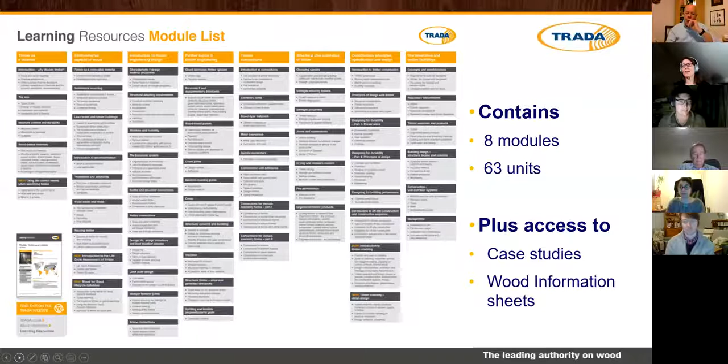In the learning resources, there are 8 modules and 63 units. So if you want to start with construction principles, specification and design, this is where you head. They are all PDFs. You click on them, download them, and save them to your computers. Why choose timber? Breaks it down into deeper depths, shows you the details, and shows you all the cross sections and what is called what.

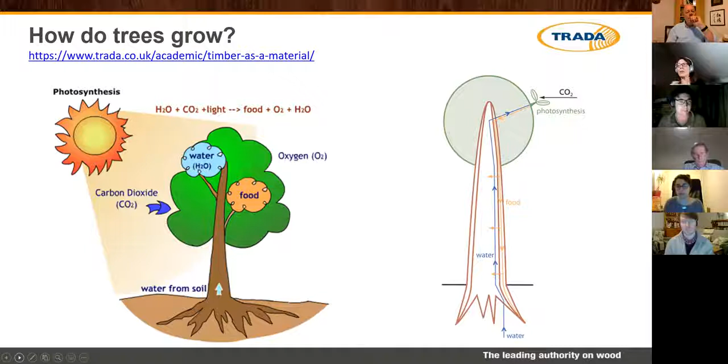But how do trees grow? You have a seed, you have some water, you have some sunlight and some earth, and up they go. They grow from the inside outwards. So if you imagine a traffic cone, imagine another traffic cone on top of that, and another traffic cone on top of that. And that's how they grow each year. Every year they grow outwards and they grow upwards. And if you see that little green shoot on the outside there, that's the branches, and that's where the leaves are, and that's where photosynthesis happens.

On the outside of each tree, there is sapwood, which starts in the middle, and every year as the tree ages and it grows outwards, that sapwood matures and turns into heartwood. Now, all sapwood is non-durable. Remember that, because we've got something to come back to in some later webinars.

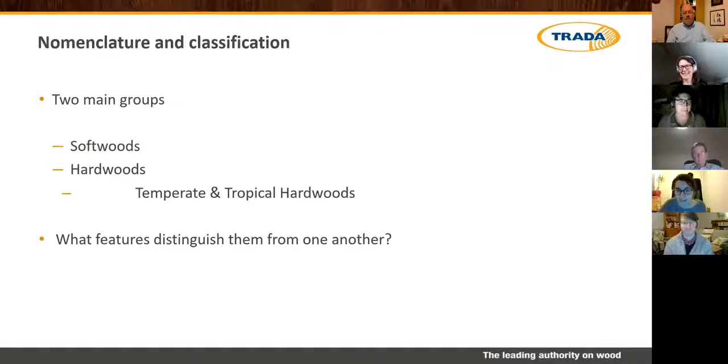What distinguishes one from the other is not what the majority of people think, it's the seeds. The softwood has a naked seed and the hardwood has a covered seed. So it's nothing to do with the branches, it's nothing to do with the leaves, it's nothing to do with the density, it's nothing to do with the durability. You come right back to the seeds.

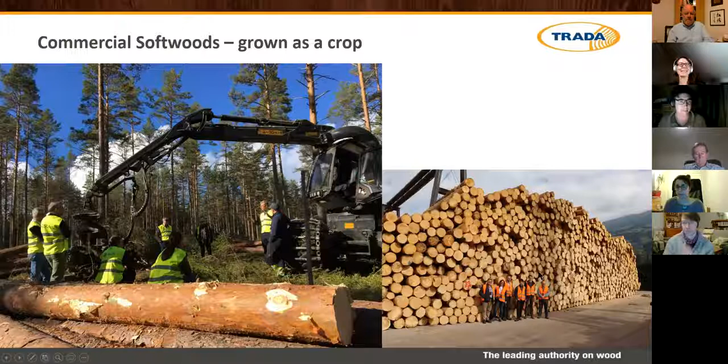So softwoods, mostly evergreen, needle-shaped leaves, 650 species, but only 60 in commercial use. But you'll probably only use 6 to 10 of those commercial species in construction itself. And commercial softwood is grown as a crop. So it's planted specifically for that reason. And we have a fair amount of it. And Charlie, I'm sure, is going to pick up on that.

Hardwoods, mainly deciduous, but you do have some evergreen. They are broadleaves, 50,000 species, 2,000 in commercial use, but they all have specialized end uses.

So green softwood, newly felled logs can have a moisture content of over 100%. Now, some of you will be going, is that true or false? Anybody in the chat box want to answer that? Can you have a log with more than 100% moisture content? I'll come back to the answer.

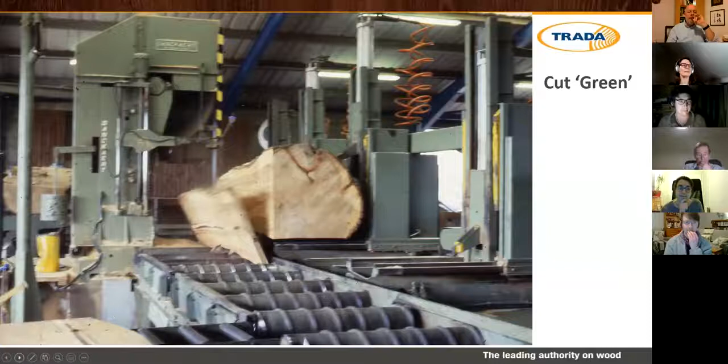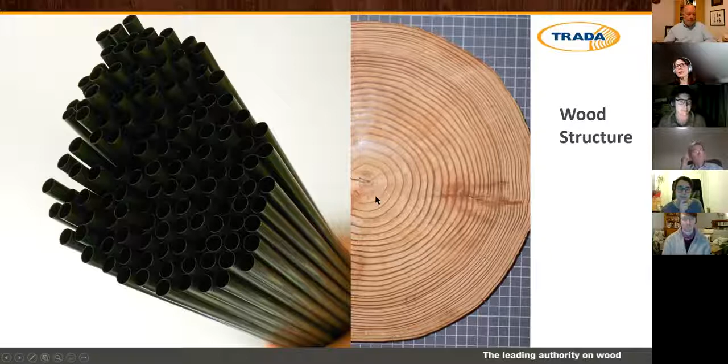And when it's cut, timber is green, and it is full of moisture. But to use it in construction, or actually use it in a house, we need to dry it down. So the wood structure, on a very basic level, it looks like a whole bundle of straws. So if you imagine all these little rounds here full of straws, you'd be looking down loads and loads of straws. And there you can see it.

So this is what I'm talking about. And this is the vessel inside those straws. And this is full of water. And the cell structure, the walls of those cells are also full of moisture. It dries from within inside the cell first and then outside, out of the cell wall. So different timbers, softwoods and hardwoods, have different wood structures, but I'm not going to touch on that. I'm just letting you know that.

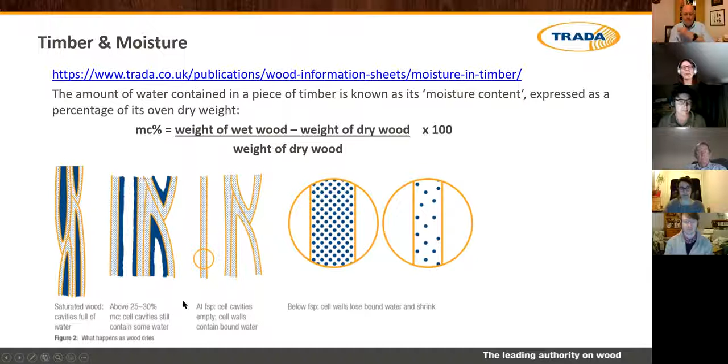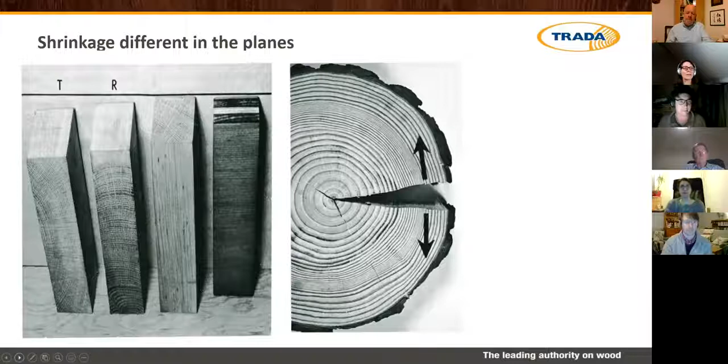Is shrinkage predictable? Yes. So if you see a cross section cut here from the middle of the tree, it shrinks to this pattern. If you have a quarter sawn board, it shrinks very evenly. If you have an edge board or a falling board, it will shrink, always cupping slightly towards the center. And this is something you want to bear in mind when you're looking at cladding and actually attaching it to a building. You're always better off putting the heart side outwards, so facing outwards.

So about moisture content, we talked about the wood needing to dry out, and it shrinks as it dries out. Now I'm going to zoom through this. When you say a moisture content, it's the percentage of moisture within a fully dried piece of timber. And how do you find that out? In our labs, we dry it down until there's no more moisture in it. And we get the weight, and then we do some calculations, and we find out what the density of that dry piece of wood is. And that's then how we work out the moisture content. But for any of you who are wanting to do it, get yourself a moisture meter, and that will indicate what your moisture content is.

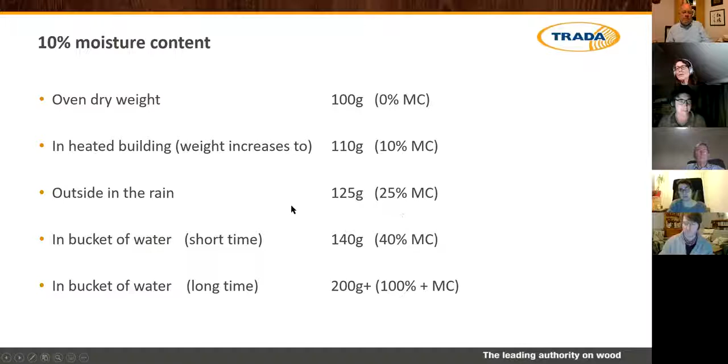And so within buildings, we're looking for a range of moisture contents so that the wood doesn't shrink, and so it also doesn't degrade. Because one figure, which I unfortunately haven't got on here, is 20%. You want to keep your wood below 20% if it's in construction in your building. Because at 20%, if it's held there for any length of time, it will start to degrade. And we want our buildings to last a long time. So we said shrinkage and movement is predictable, but with different species, you get different movement characteristics. So something to bear in mind when you're specifying your timber.

When I mentioned moisture content and why it's important: for external joinery, you're looking for 12 to 19% average moisture content. In an unheated building, you'll be looking for 12 to 16%. In a heated house, you'll be looking for 9 to 13%. And in a very nice and warm heated house, you'll be looking for 6 to 10%.

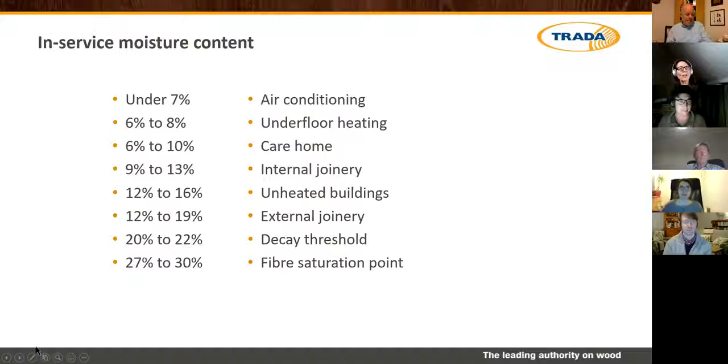And timber reacts to temperature and humidity, and it absorbs and desorbs moisture. So you can never keep it at one moisture content. It will always be adding and subtracting a little bit. But once you know where that timber is going to be, then you can predict what moisture content it will eventually settle out at. And that's called the equilibrium moisture content.

This is a chart we tend to use. In an average house, you'll be wanting to keep your relative humidity between 40 and 60%, because that's a healthy moisture content to stay at. Let me go back one. So 50% relative humidity, 20 degrees temperature. This is the indoor equilibrium moisture content you'll be aiming at. So 10 to sort of 12%.

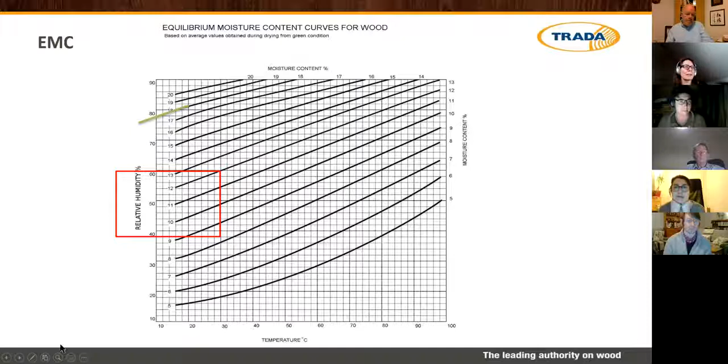And we have, from those sawn logs, a huge range of products that Iain will cover later. So we have sawn timber, we have timber-based products, and we have engineered wood products.

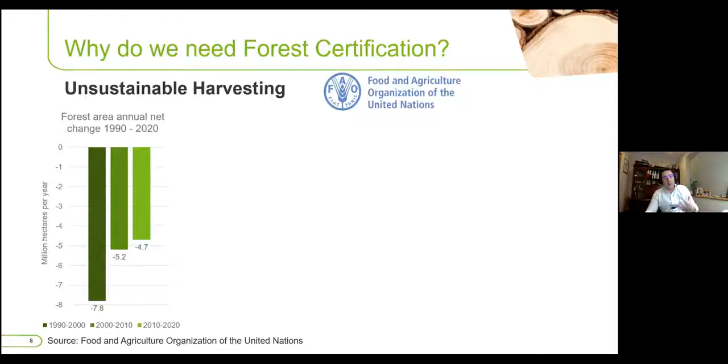So we do need to make sure that we try and slow that down and insist on sustainable forestry. Not all of that is down to timber. A lot of that is through land change, moving over to agriculture for things like beef production, soya and stuff like that. So it's not all to do with illegally sourced timber. A lot of it's down to land change in those areas.

So what does sustainable forest management look like? Well, Tabitha showed you some pictures earlier on. Softwood on the left, like I say, it's a crop, and generally over a 50-year rotation in a lot of cases, depending on where you are in the world. In the UK, it's generally around 50 years, and that would be thinned a number of times over that period. The picture there shows a 30-year thinning, and that material would be going into things like fencing, and the remaining trees would go into your structural timbers for building.

On the right, it's slightly different for hardwood trees. They're generally what we call selective felling. So you'd go into the forest and you'd only take out so much every year that would allow that forest to regenerate over a certain amount of time. So in the hardwood forest, you never actually clear fell in most cases. Softwood forest you would, and you replant.

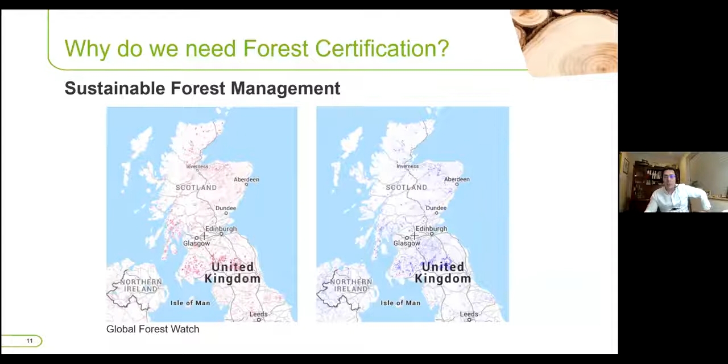Similarly, in the UK, a lot less forest cover. We've only got about 13% forest cover in the UK. But you can see there that where most of our forestry is located up in Scotland, a good correlation there between what's coming out and what's gone back in. But when you compare that to places like Brazil, South America generally, you can see there that there's not a lot growing back from what's been taken out. I think Chile's the only South American country that's deemed to be low risk, sustainably managed forest.

So looking at the UK timber market, what does that look like? These are the latest data from the Forestry Commission.

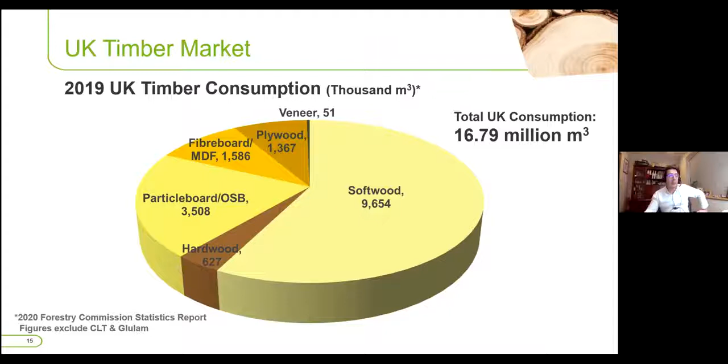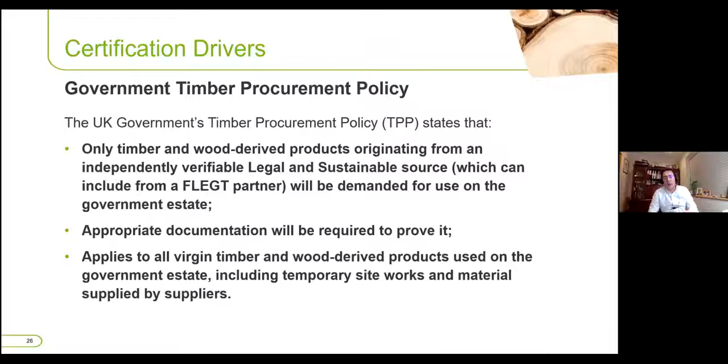Now the drivers, you're going to know a lot of these drivers, but probably the main one that started it was the UK government's timber procurement policy, which requires all timber to be from a sustainable source, and they will ask for evidence for that on projects that are from the government estate. That's been picked up by a number of building certification schemes, so things like BREEAM, LEED and SKA all require certified timber for their schemes.

And in addition to that, the UK Timber and Timber Products Placed on the Market Regulations, which came out in 2013, based on the EU Timber Regulation, now just apply to the UK because of Brexit. This is just for legality, but it's a major driver in making sure that all the timber has got due diligence associated with it, and a lot of that due diligence can be covered by the certification schemes.

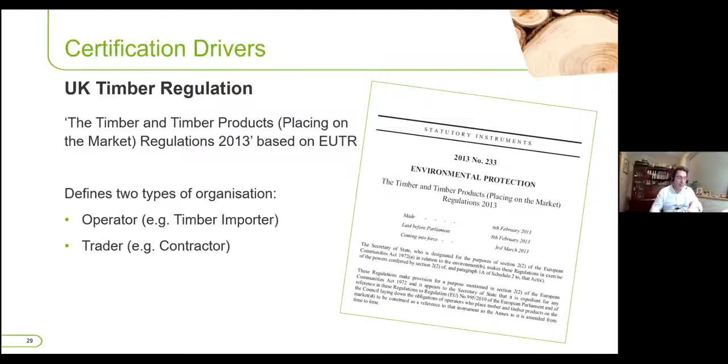And we had a great discussion last night on climate for those here, and another one tomorrow, so I won't go too much on that. All I will do is point in the direction of things like the Wood CO2ts Less campaign, which is trying to promote timber. But the key driver, in my experience, has been reputational damage. We've got all those key drivers there, but people don't want to be seen in the press as getting it wrong.

So what should we be doing? How should we specify the timber that we bring onto our construction sites? Well, for me, there are five main points that we need to make sure that we cover in a specification clause. We must reference timber and other wood-based products. Lots of other wood-based products are used on construction sites, so make sure we reference those. Make sure you define the scope.

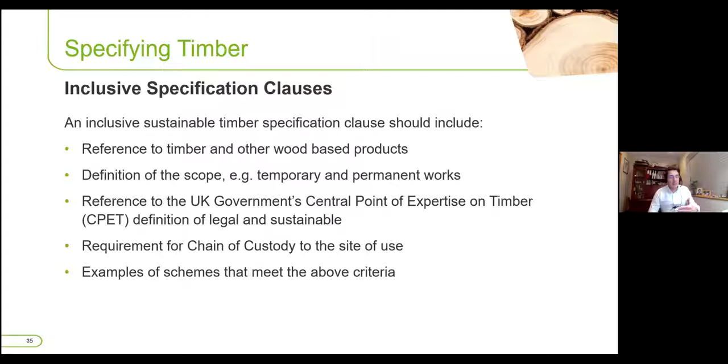Key one for me, make sure there's a requirement for chain of custody to the site of use. Like I say, we'll talk about chain of custody in a minute, but make sure that's there. That's your guarantee when you get that delivery ticket on site that the timber that's arrived on your site is from a certified source. And where you can, put examples of schemes that meet that criteria. Now we've got a standard one here. I think Tabitha's going to be sending around slides possibly later on, but you can pick this out.

This specification here: all timber and wood-based products for either temporary or permanent inclusion in the works must be from legal and sustainable sources as defined by the UK Government Central Point of Expertise on Timber and be delivered to site with a full chain of custody. Chain of custody certification schemes recognised as meeting the above include PEFC, FSC and Grown in Britain. So that's all you need to have in your specifications. That will cover all the timber on your project.

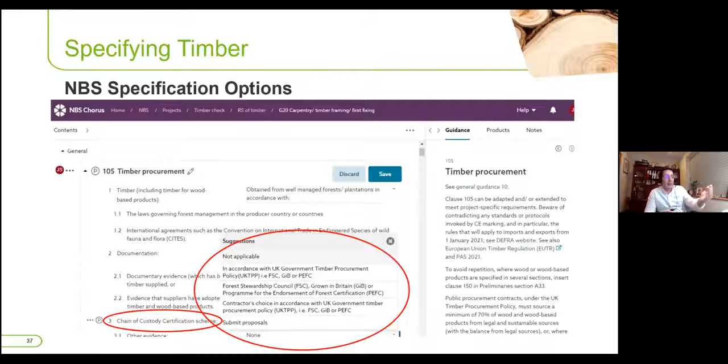If you're using things like NBS, we've been working with NBS and you can use their standards as well. So 105 timber procurement gives you almost the same requirements there, and sets the chain of custody schemes that you need to adhere to if you're using NBS.

So chain of custody, we mentioned it a few times. What does this mean? Well, chain of custody, we've got our forest and that's certified to, for example, PEFC. So the timber coming out of that forest can carry what we call a claim of either PEFC, FSC or Grown in Britain. Nowadays actually it can cover all three. All 3 claims can be on the delivery ticket. Can't be on a label, but it can be on the delivery ticket. That material is delivered to a sawmill and that sawmill has to be audited against those chain of custody standards for those 3 schemes, again, to be able to pass that claim on to the next person in the chain.

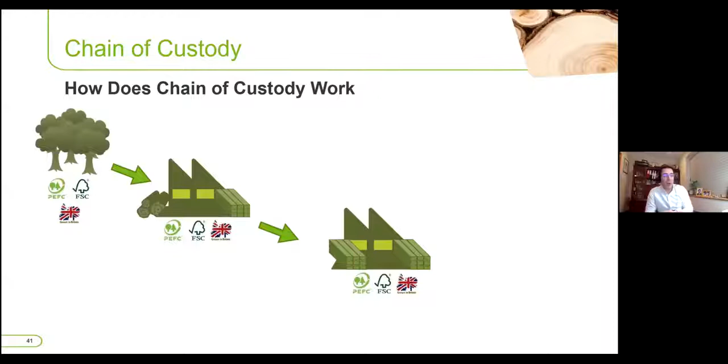Talked about auditing earlier on, and NETTA talked about how their members are audited to make sure that they can pass those claims on. Again, that sawmill will pass that timber on to, say, a merchant. There could be an Arnold Laver, Travis Perkins, someone like that. Again, that organisation will be audited, and those branches will be audited to make sure that they are applying the standards correctly. And then that timber is delivered to site.

Your site does not need to be certified. All you're doing is checking to make sure that the timber delivered to that site carries a claim on the delivery ticket. There is an option to certify the site as a project certification, but that wouldn't necessarily be talked about, and we're not talking about project certification at the moment.

Any timber that goes anywhere else to be fabricated into a product, so if you've got furniture coming into site or windows or something like that, and that timber's either going direct from the sawmill or from a merchant before going to your site, again, that person doing anything to that timber needs to be registered with a chain of custody as well.

And if you've got an inclusive policy that includes all the certification schemes, it doesn't really matter what certification one of those bodies holds. If, for example, our furniture manufacturer only buys PEFC timber, then there's no point in them having the other two certification schemes. So they might just hold PEFC and supply PEFC certified timber into your site.

The issue comes when they don't hold anything. They may be buying certified timber, but if they don't hold that chain of custody certification themselves, they then can't pass that claim on to your site. And that's what we call a broken chain of custody. And in this situation, it's easy to spot because they wouldn't hold a chain of custody certificate. The trouble is where they are buying timber that's not certified from someone else down the chain.

And that's where it's not as easy to spot, because you might go to your merchant or your timber supplier and ask for their certificate, say they're registered as a chain of custody, but this is why you need to make sure that it's actually on the delivery ticket as well.

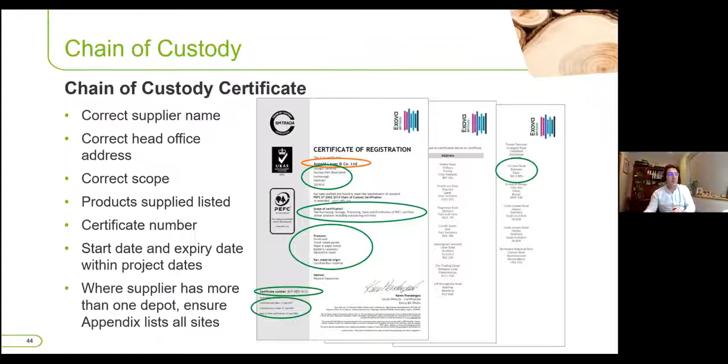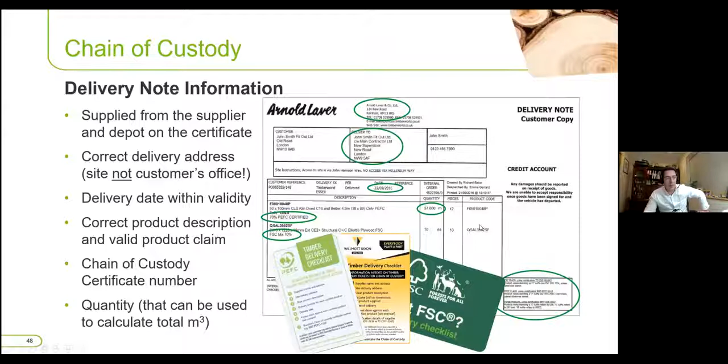There are various tools to help you check this. PEFC's card is great, so if you need any of these, I'm sure PEFC will be willing to supply these to you. It's a great little check card you can hand out to staff on site to make it easier to check that the timber's from the right source.

So we talked about claims. Just a quick touch on what claims you need to look for. Chain of custody claims: if it's all from a PEFC certified forest, for example, you will see on that delivery ticket that it says 100% PEFC origin. But in a lot of cases, you will see a percentage claim, and the minimum will be 70% because that's the minimum recognised by CPET. But that doesn't mean that only 70% of that timber is sustainable. All of that timber is sustainable. What it's saying is only 70% is from a PEFC certified forest.

So in this example, we might have 70% from a forest in the UK which carries PEFC certification, with 30% coming from a UK Forestry Standard source, which doesn't meet the requirements of PEFC. That would go into the sawmill, they would mix that in the sawmill, and it would come out with that 70% claim. So all of the timber is from a sustainable source, but only 70% from a PEFC source.

That's raw timber, say a sawn timber product, but it may be a product like a door. In that case, the door manufacturer further down the line may be buying timber from two different sources. One is maybe the FSC chipboard core, and the other is PEFC certified, say, oak veneer and lippings. In that situation, that door manufacturer can decide which one he wants to go with, by volume obviously. So in this case, it would be FSC.

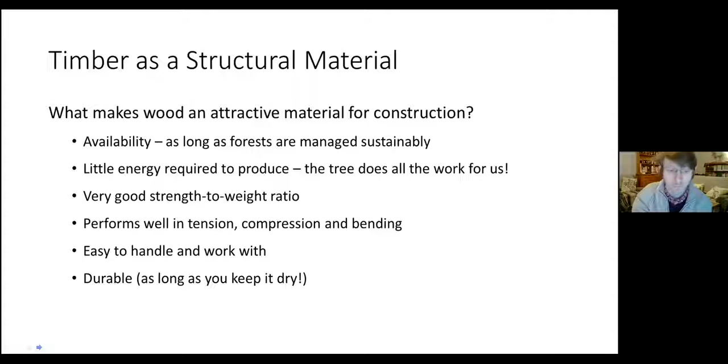It's a very strong material. It's got a good strength to weight ratio, performs well in tension, compression and bending, and it's easy to handle and work with on site. And as long as you keep it dry, it's also very durable and can last an awful long time.

So it's a natural material, and it's important to remember that wood isn't really just one thing. There's thousands of different species, as Tabitha's mentioned, and also different environmental growing conditions have an effect on the properties of the timbers. So a Sitka spruce grown in the UK will have different properties to Sitka spruce grown in its native Alaska, for example. So we need to think of a way that we can categorize this timber so that we're not using timber in an inappropriate place in a building or structure.

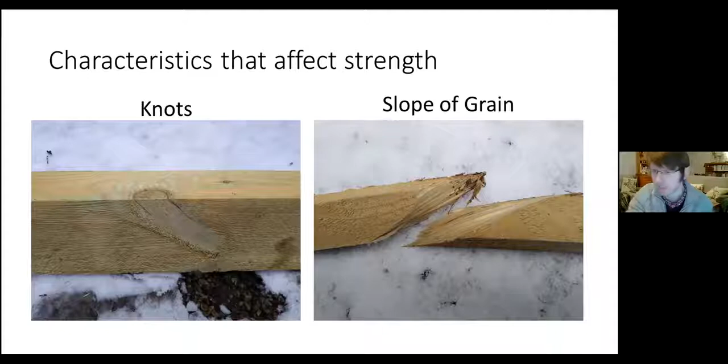On the right, the slope of grain. We said how the timber is strong along the grain, but once the grain starts to be angled to the axis of the piece of timber, then it weakens. And you can see here how this piece of timber has just sheared through because of the angle of grain, which you can see is about 30 degrees to the piece.

So looking at these natural defects, we grade the piece of timber. So there's two ways we can strength grade timber. We can do it visually, i.e. a human being looking at a piece of timber and using rules based on the sizes of the knots and the angle of the grain to decide if a piece is strong enough or is not strong enough and is rejected.

Similarly, you can use a machine to use a non-destructive test, such as bending it or scanning it with a laser to pick up these natural defects, and again categorize as a pass or a fail. And the strength grade in combination with the species and the origin of the wood allows us to assign a strength class to that piece of wood.

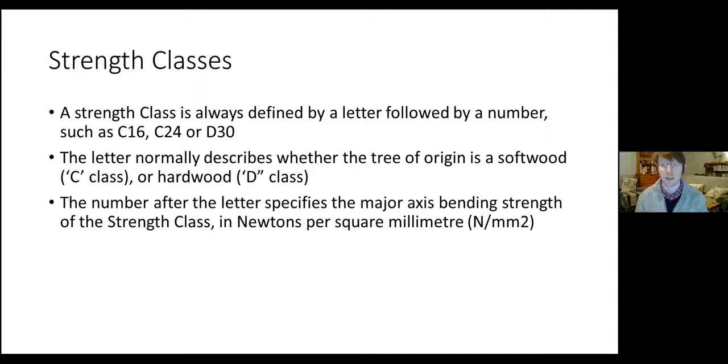So strength classes are defined by a letter followed by a number. The letter stands for softwood or hardwood, C or D class, and the number represents the major axis bending strength of the strength class. So that's in newtons per millimeter squared. So a C16 piece of timber would be a piece of softwood that has a bending strength of 16 newtons per millimeter squared.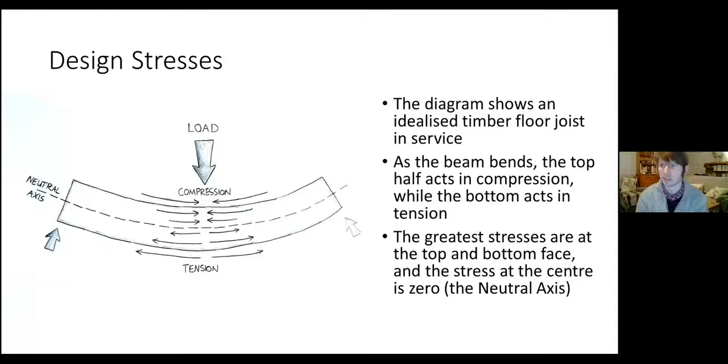So if we think about that, that means that actually a lot of the timber in the center of a standard section of timber is not really being used efficiently because it's got very low stresses. So there are natural limitations to solid section pieces of timber. Also, just growing sections of timber for larger spans takes more time, which is more costly, and with modern growing and harvesting techniques, you're looking at a 50-year rotation. So actually growing really large sections of timber just isn't very easy.

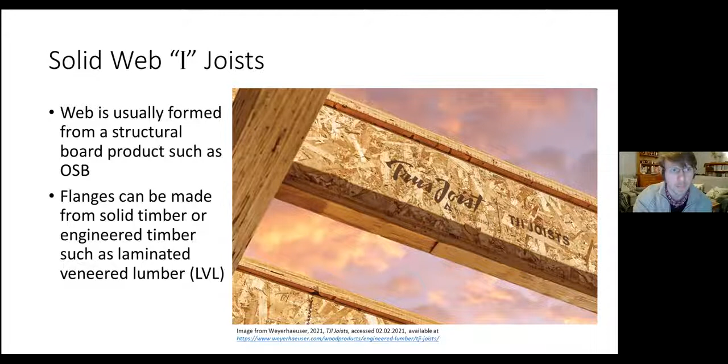And you can also get metal webbed I-joists. So these have advantages in terms of installing services. It's very easy to slot them into the depth of the floor, and these are also easier for smaller scale manufacturers to construct, so there are more producers around. And yeah, these I-joists give you that advantage of being able to span further with less material.

Another engineered material that has been developed is glulam. So throughout the 20th and 21st century, there's been this tendency towards larger structures, larger spans, and in just solid natural timber, there'd be a risk of timber being left behind. So in order to sidestep this, and with the increasing development of really good structural adhesives, it's allowed the development of glulam, or glued laminated timber, where small sections of high quality, low defect timber are glued together. You'll notice that the grain of each of these small sections is running in the same direction, so that the strength along the grain is maintained, and these are typically used in beams.

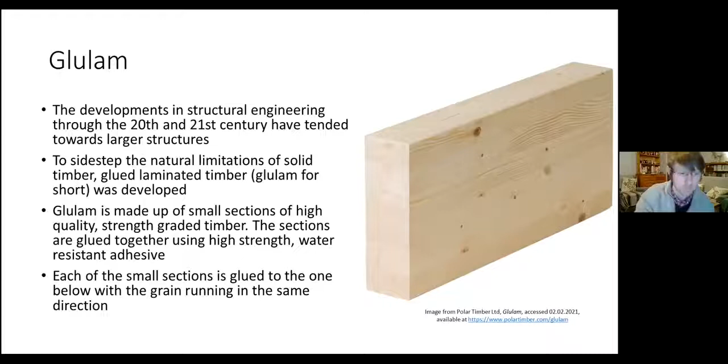So here's just an example of just how large you can construct them, and that's 1.2, 1.5 meters deep, and they can span up to 30 meters. And really, the major limitation is actually just getting the beam onto site on the back of a truck. Just another photograph. Glulam is also very popular architecturally, because it's visually very appealing, as well as being a very high-end structural product.

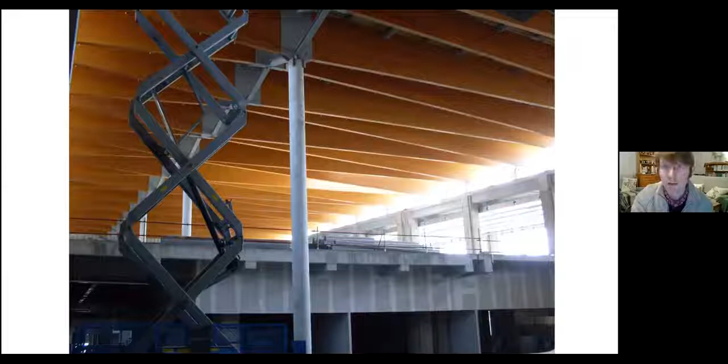So we can form glulam in two different ways. With the stresses being concentrated through the section at the top and bottom, we can take advantage of this and put higher quality, higher strength class material at the top and bottom of the laminate glued section. So that's called combined glulam. And alternatively, if all the sections have the same strength class, then that's known as homogeneous glulam.

And the final engineered product that we're going to look at is cross-laminated timber. So again, it's manufactured in a very similar way to glulam, but rather than the sections all being glued with the grain in the same direction, these are formed cross-banded. So you can see that the grain on one layer is perpendicular to the sections above. So rather than beams, this is used to form large panels, which can be used to construct walls and floors.

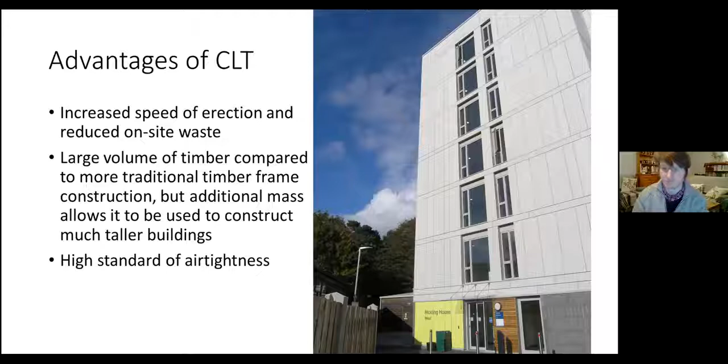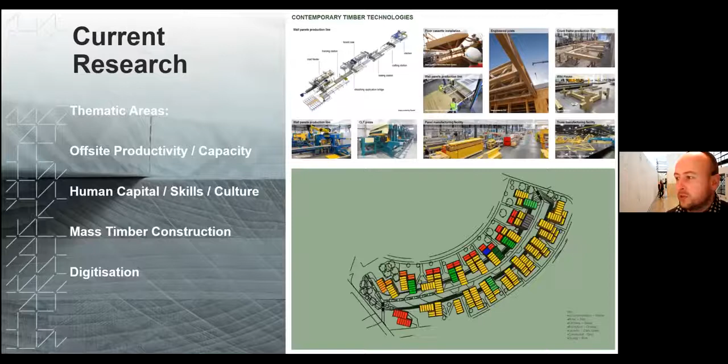A lot of work in mass timber construction with a large focus on integrating the supply chain or the value chain, so we get more homegrown timber utilised in these products and systems, and there's a lot of good stuff happening in that regard at the moment, and a lot of work also in digitisation. The premise for that really is to demonstrate the whole life value proposition of why you should use timber and offsite industrialised forms of construction. So yeah, we do a lot of this stuff and generate a lot of outputs.

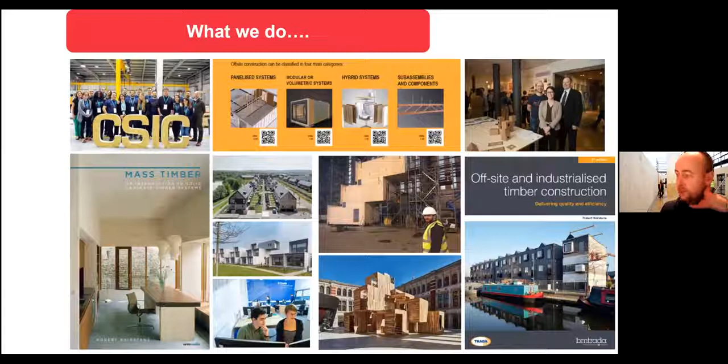But I think this evening really it was to look at one of these outputs and give an overview of this, and really just work through a bit of a synopsis of this book that was produced by myself on behalf of TRADA. So we'll use that as a framework for what we'll go through and how these types of approaches really can look at delivering quality and efficiency.

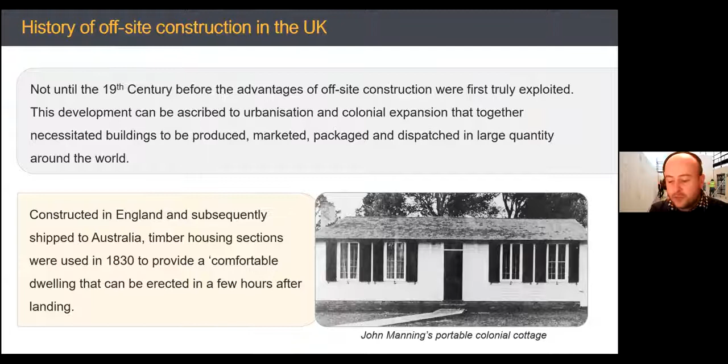So yeah, offsite is really interesting. Just a bit of background context. It's not actually that new. We can even go back to the likes of cruck frames, but it really took hold early 19th century. You have things like the Manning cottage, which were exported as a result of colonisation in Australia, etc. So lack of skills, need for shelter. So houses essentially fabricated in the UK and shipped abroad. So these forms of construction have evolved. So I mentioned cruck frame, manufactured off-site in carpenters' yards for quality assurance purposes, before they're shipped to site.

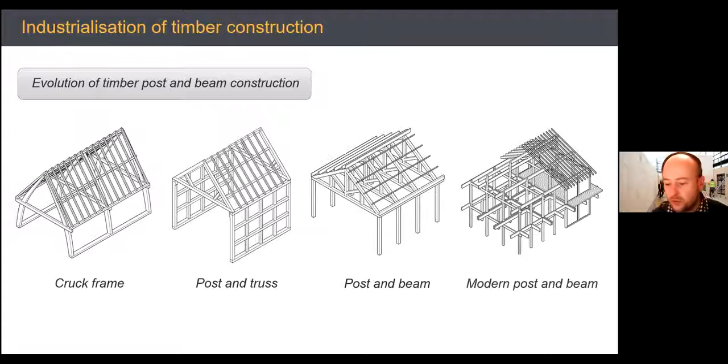But post and truss forms evolved, and post and beam, and then you've got modern post and beam systems. And I think what's interesting is these forms all still exist, even cruck frames, Oakwrights, for example, in the southwest of England, but they use CNC machining for their joints. We have other forms of timber frame, so box frame construction, balloon framing in America, which evolved to platform framing, and then you have the modern closed panel systems, so more levels of enhancement, incorporating engineered products and systems within them. And again, these forms all still exist in a sense. And even the mass timber products, again, an evolution of what's taken place.

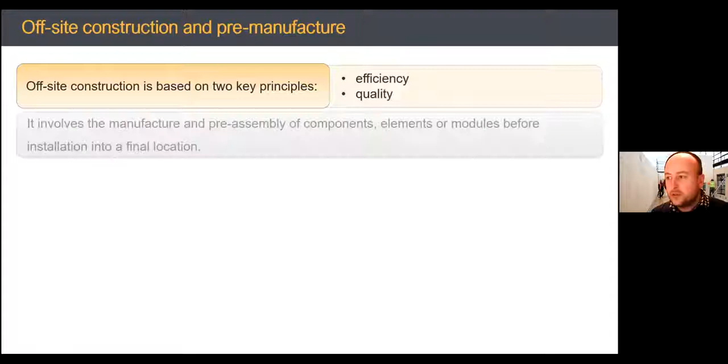We had round log construction, with sawn logs to create square log construction, and then with the advent of mechanical or indeed adhesive types of fixings, we had the creation of cross-laminated timber. So these forms of construction have evolved as a result of the material and the context, but also the type of timber in the region, etc.

But we can loosely categorise offsite into 4 broad categories: panelised, volumetric, hybrids, where you've got combinations of these, or indeed sub-assemblies and components. And you can either have one consistent form through your building, or a combination. So that's where you move towards levels of, say, customisation.

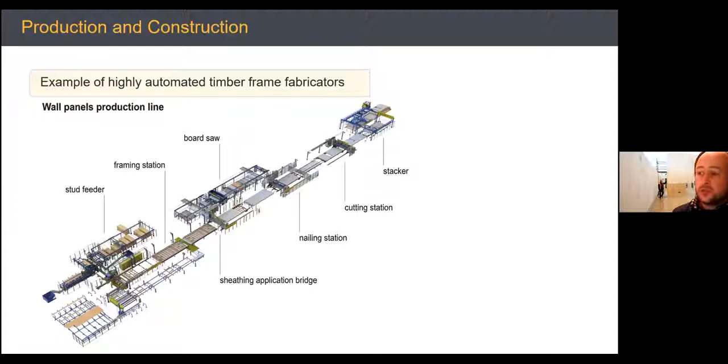So, as I've explained, things have evolved, mechanization has evolved, and now we've got even full production lines with higher levels of mechanization, or indeed automation, with things like robotics coming more to the fore. And all of this is about improved levels of quality and efficiency, and balancing that with the relative level of standardization and the product supply chain.

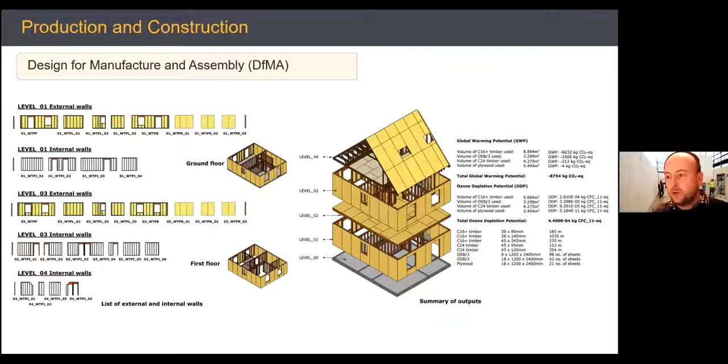I mentioned digitization, use of computer-aided design and correspondingly computer-aided manufacture, and in line with that, thinking about how you design for manufacturing assembly. And I like to think of what are the capabilities of your manufacturing setup rather than the restrictions. So what are the capabilities of it, and correspondingly how do you design for manufacturing assembly? And if you want to think beyond that, what does this mean in terms of circularity and disassembly, reuse and reutilization, so that you maximize the value of the resource in the built environment?

So when you're thinking of offsite, think of it in terms of a production flow: your standard production flow, or what you could be doing offline from that standard production flow, in order that you create degrees of standard product and customizable product to reach the client's requirements. And of course, how you do this in an efficient manner, and how you adopt the principles of lean. So teamwork, just in time, communication, transparency, waste reduction, not just product waste, but also time waste, etc. So it's all about how you embrace these types of theories and approaches.

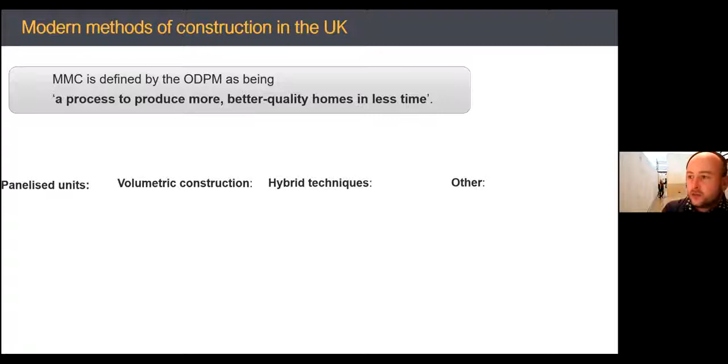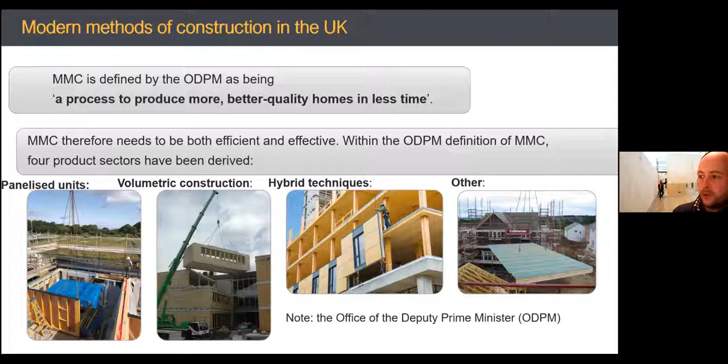In line with that, modern methods of construction is often a terminology used. I think key for me when you're thinking of MMC, it's about efficiency and effective ways of working, and innovative ways of doing things. So there are categorizations of it, but I tend to think of it more broadly than these categories, because one of those categories is other. So those other forms can actually take place on site, such as full floors built at ground level and then lifted into position, or the proprietary construction of a roofing system. So there's other forms of what you can do, not necessarily fully off-site.

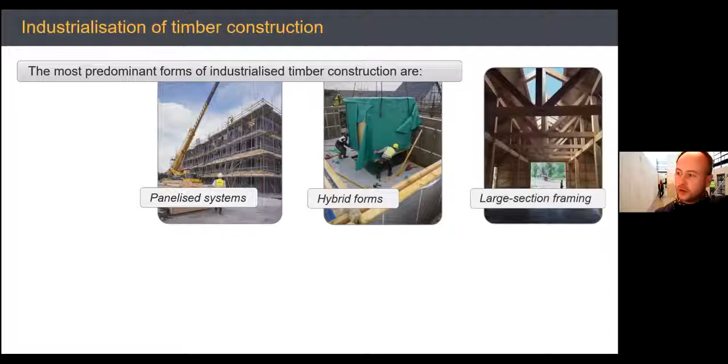In line with that, there's the Farmer Review and thinking about pre-manufactured value add, in terms of what level you're doing off-site, and what proportion of modern methods of construction you're applying on site, in terms of gaining your efficiencies and meeting your clients' needs with customized solutions, etc. So without getting too bogged down in terminologies, it's just to point out that there are a range of products and systems available: panelized, hybrid forms, large section framing, volumetric, mass timber construction. And we'll touch upon mobile, digital fabrication, pop-up factories, the flying factory.

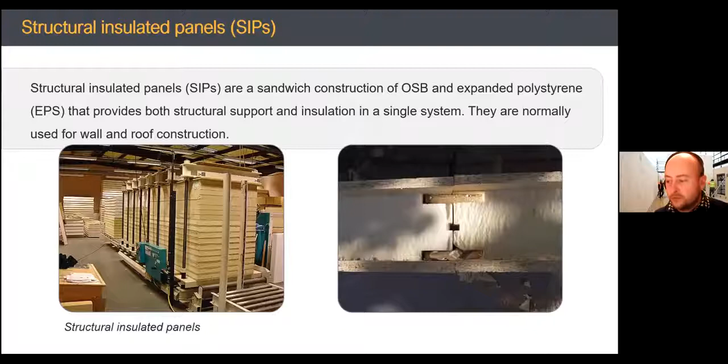So there's a whole myriad of ways of doing things, but it's about how you deliver with efficiency, thinking of design for manufacturing assembly, and indeed disassembly, reuse, and to that end, circularity, and correspondingly a more industrialized approach, employing lean techniques. And when we think of panelized systems and combinations of materials, just to touch on structural insulated panels, I tend to prefer more natural forms of construction, but SIPs, oriented strand board with expanded polystyrene, manufactured off-site to improve thermal performance, air tightness, and reduce things like cold bridging.

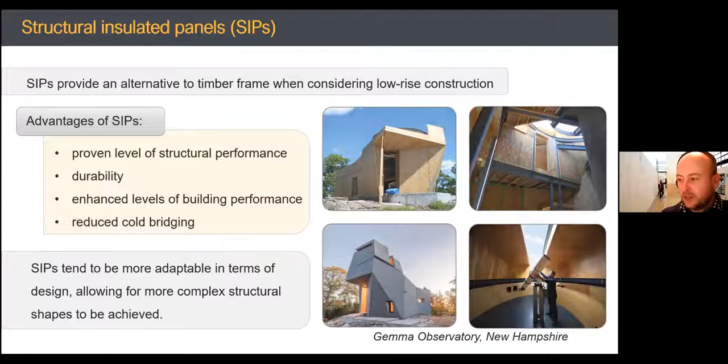And these types of products and systems have advantages in terms of how they combine materials for improved structural performance, and as I say, reduce things like cold bridging, and indeed they can be quite adaptable forms of construction in terms of how you can make these panels and then cut them up to form different shapes. And they're a neat example of where it's been used in an observatory, because seemingly high-powered telescopes need to have good moderation of internal thermal performance. So I think it's given due consideration to the context to which you're applying the techniques.

So solid laminate timber systems have been touched upon. There's a full range in there. There's glulam, there's laminated veneer lumber, there's cross-laminated timber, which use adhesive bonding techniques. There's also the structural composite lumbers like laminated strand lumber or parallel strand lumber. They tend to be more in North America, but we have a lot of LVL, certainly via Metsä

Wood in Finland. But you have mechanical forms as well, nail laminated timber using aluminium nails, so you can CNC machine. You have dowel laminated timber, which uses hardwood dowels of low moisture content, which swell and lock together the softwood lamellas. So they have a mechanical performance through full utilization of timber and different timber types to make that mass timber component.

As has been touched upon, as a result of these mass timber products, there's exponential growth within the market, and it's grown from these stats in 2017, and you can see that there's still a huge volume of timber that can be utilised for these types of products in order to sequestrate carbon in the built environment, and these mass timber products and engineered products and systems provide scope for larger spans, or higher stories and so on.

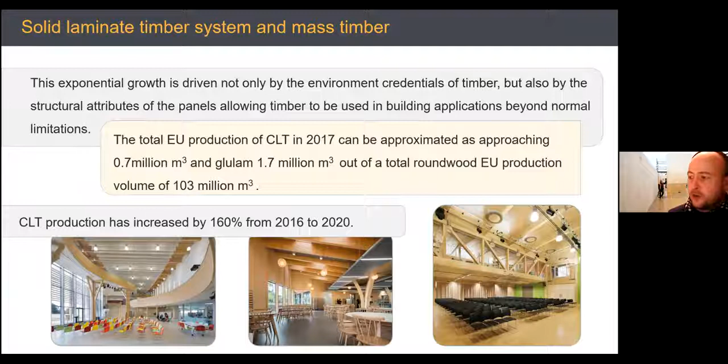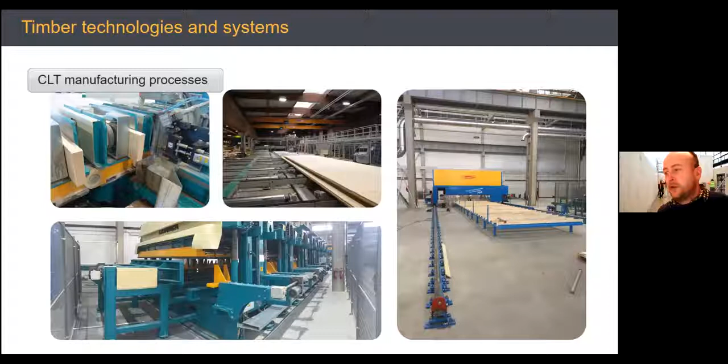In terms of that, again, cross-laminated timber is manufactured off-site: defect cutting, removing the knots and finger jointing, stacking the lamellas up, and then obviously applying an adhesive and pressing that. And then at the end of it, CNC machining. So again, what's key in that is, because you're using adhesives, it has to be a controlled environment. So managing moisture control, etc., and having high levels of quality, performance, and accuracy.

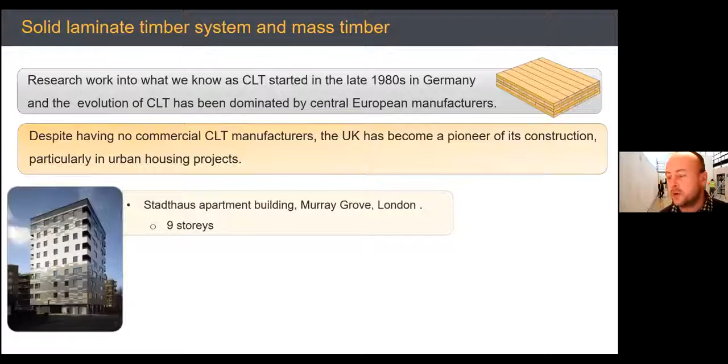The research work for CLT has been claimed to start in the 80s. And currently we don't have a commercial manufacturer in the UK as such. We do produce it in Scotland on a pilot scale through the Construction Scotland Innovation Centre, and indeed we've just finished a project there before Christmas to be exhibited at COP26. But the main stuff is really imported.

There were the original projects in terms of Stadthaus, and then there was a lot of work by Waugh Thistleton architects and others really pushing the boundaries in terms of how this product can be used. Of course, things that are impinging upon that just now are fire performance, the Grenfell Tower disaster, etc., and restrictions in terms of story heights. Nothing to do with timber, but ultimately it impacts upon how timber can be utilised in the UK market.

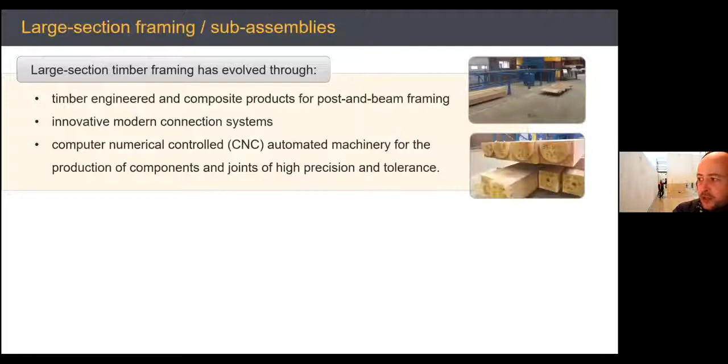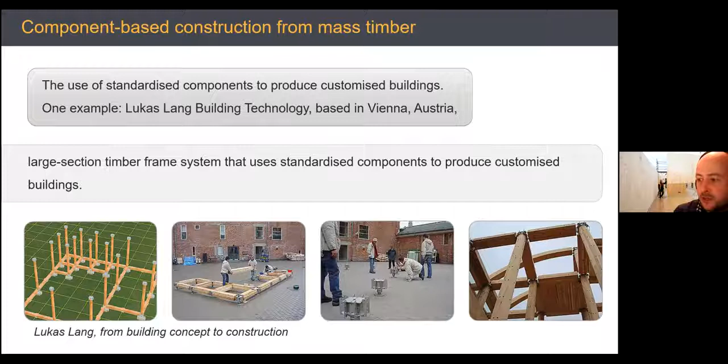As I've mentioned, not just CLT: large section framing, CNC machining using things like Hundegger machines, a lot of work in Germany in these types of systems, a combination of post and beam techniques and panelized systems, and you've probably seen these high spec Huf houses on the likes of Grand Designs. What's interesting here is the standardized building components and systems. You've got companies such as Lukas Lang that have a platform approach, standard connections, and a sort of gamification of how you can put this together to produce built systems. So standardized component parts which you can customize relative to their levels of flexibility.

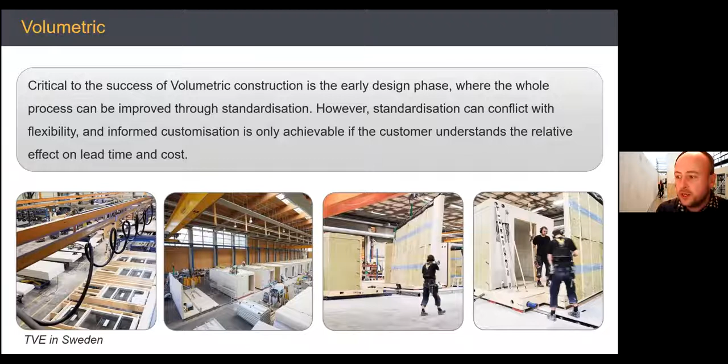In line with that, volumetric, where you move to a high level of enhancement in the factory environment. So you really have to think about the levels of standardization and repetition through that production line. You also have to think about your transport, your logistics, and with the additional weight of a volumetric system, where do you place a crane on site, and can you lift that volumetric unit into place? So a lot has to be thought about in those design stages as you move up to higher levels of enhancement. And often that's why hybrid forms are very useful, because you can get that combination of the different forms of construction.

And there's really good big showcase examples of this in the UK. So timber-based forms of it aren't just used for housing; they're used for things like the BSkyB showcase building, and that was a hybrid form in terms of engineered timber products and cassetted forms with a large glass facade. And hitting things like BREEAM Excellent.

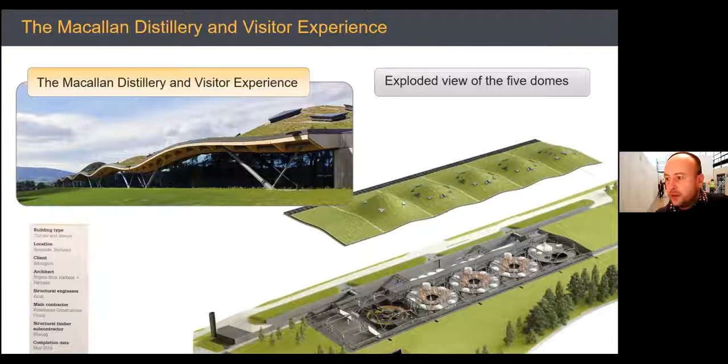And of course, being in Scotland, being Scottish, we've got to bring up whiskey. We've got the Macallan distillery visitor experience. You wouldn't necessarily think this has offsite forms of timber construction within it, but it is a hybrid form. And the roof structure indeed was formed using engineered timber systems and cassetted roofs, which were fabricated as such and dropped into position.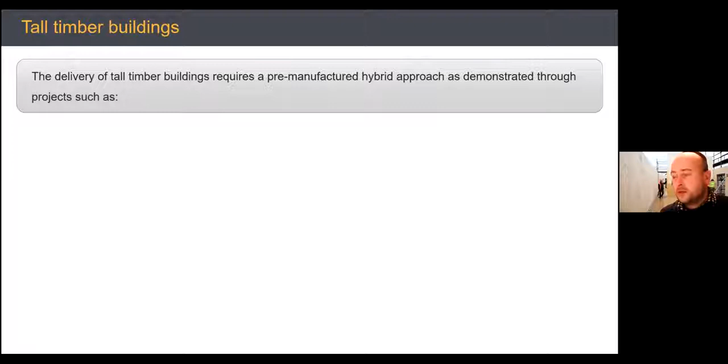And what hybrid's also doing is helping to push the boundaries of where timber is being used. So we have examples of where these mass timber products are being combined with steel and concrete as well. And to that end, there's interesting things in terms of timber concrete composites also. But yeah, these hybrid systems are helping to push some of the boundaries.

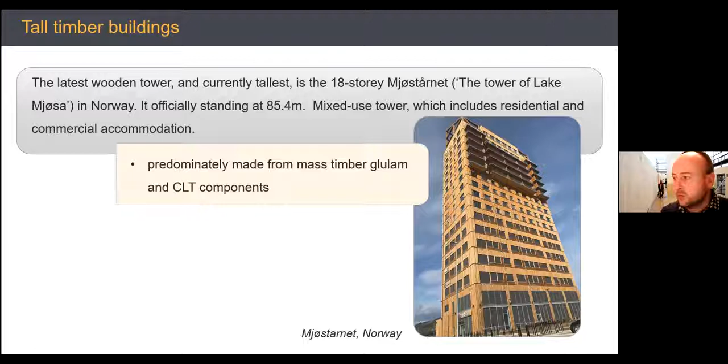And as had also been mentioned, it doesn't necessarily have to go to combination with other materials, because we have the Mjøstårnet project in Norway, the tallest timber building, which is principally engineered and mass timber products that have been utilised for the delivery of that, and a lot of work undertaken to ensure the right fire performance measures were taken. So a lot of good information that's out there and available.

And then just to touch on it, going across this, I mentioned the hybrid, the tall timber buildings, but then we have things like the mobile and the flying factory for the much smaller scale. So in the US, there's even mobile framing equipment which you can take to site, to get levels of accuracy and consistency in what you're manufacturing there.

You have mobile sawmilling equipment that you can take to the resource. You can air dry the resource. It takes a wee while, right enough, and then you can obviously use these sort of sawmill equipments and move them around to more rural locations.

And work that's been pioneered in this regard, sort of ModCell and their flying factory concept. So you're using pop-up factories in agricultural buildings to fabricate large section frame and using natural forms of infill and insulation, often straw, etc., to create a high thermally performing product. So that's sort of alternative scales, but it gives hopefully an idea of the range and types of techniques that can be utilized.

And in that regard, there's the likes of WikiHouse, an open platform where you can download CAD/CAM files and put that into a CNC router and manufacture plywood into the appropriate shapes and fix it together. And there's underlying theories that were developed at MIT by Larry Sass, etc., that you could look into in terms of how these types of approaches can even be used for disaster relief, so you can fabricate close to site.

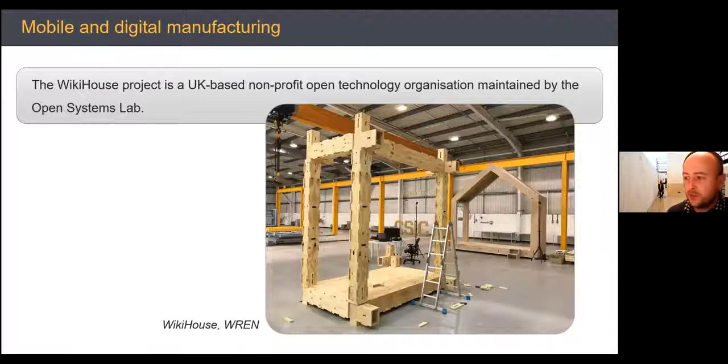So I hope that provided you with perhaps an enthusiastic walkthrough of offsite and industrialised forms of construction. And just to finalise on that, this is something that a colleague, Mila, who will talk to you all after myself, worked on, which was really about the drivers within the construction sector at the moment, and those drivers have become more complex over time since the cruck frames, the manning cottages, etc., to where we are now in terms of digitisation and higher levels of regulatory conformity to reach the sustainability requirements.

And meet those sustainability goals that Charlie touched upon, how we effect change in construction culture, move away from our adversarial approaches, how we have improved business models, how we think of whole life value proposition, not just lowest cost, lowest quality form of delivery, how we infuse that human capital, how we look at leadership and collaboration and upskilling, and fundamentally how we improve the levels of productivity.

And when we do that and we think of the improved levels of productivity, we have to think of the input as well as the output. And if we're using carbon intensive materials as part of that input and we increase that output, then we'll only accelerate the tipping point to climate change.

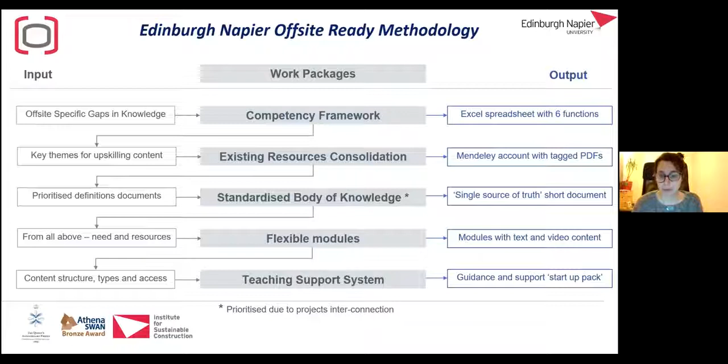Now, there were a lot of inputs and outputs within each stage. I will not bore you too much with that at this hour. But yeah, so this is just a sample of the competency framework, which you can see as an Excel spreadsheet, and it is really underpinned by this report, which I mentioned earlier, which identified the key gaps across the whole life cycle of offsite constructed projects, ranging from digital design through on-site placement and assembly, alongside other key resources.

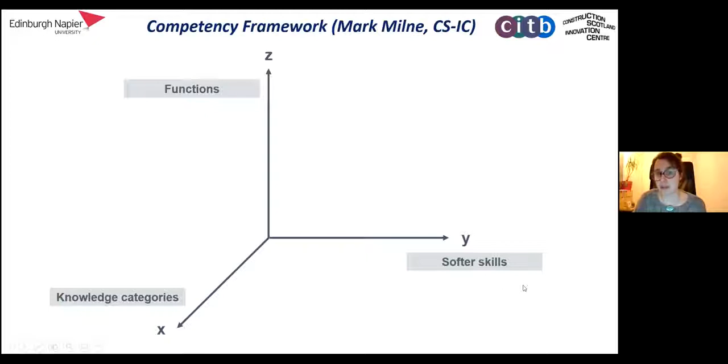And so the competency framework, I like to think of it as the 3 dimensions of space. So we have the backbone, which is the Z axis, and that really gives us the key functions or the actual knowledge that people need to have in order to undertake a successful offsite constructed project. We also have the knowledge categories, which is about how do you categorize that knowledge, and very importantly, underpinning all of this are also the softer skills or the business skills and transferable skills.

And within all of that, we've got different roles, different target learners, ranging from skilled workers to supervisors and managers, to ensure that we hit everybody across the board with the content they need for the different life cycle stages of offsite constructed projects. And so here you can see, for example, all the functions which start from offsite fundamentals through to digital design, estimating, commercial logistics, offsite manufacture, on-site placement and assembly, and finally site management and integration. So you can see how they follow the whole life cycle of the project.

Now at this point, I want to show you the actual website. Just to check, do you see the Offsite Ready website now? Could somebody let me know? Yes, we can see it, Mila. Okay, that's great, thank you.

And so you can access it very easily just by going to offsiteready.com, and that'll take you to our landing page. Now here you can find out a little bit more about the project, and if you're interested, you can also enroll in our live Udemy course, which will also give you a certificate of completion at the end. But the main thing I want to show you is that if you click here on training materials, you then get to see all these learning materials that I was talking about, and they're all quite interactive.

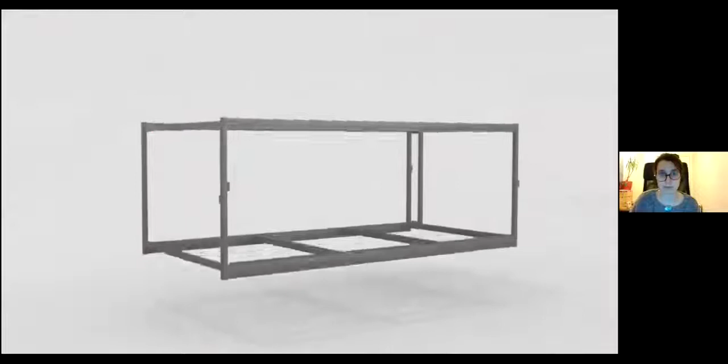So the example you see here was a custom jig for volumetric construction, and now we see a fantastic animation of a mass timber manufacturing process.

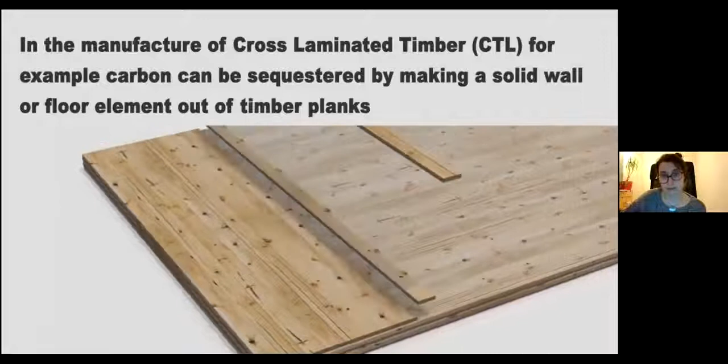That's great. And so you can see the quality of materials that are available online, and just to give lots of credit to Lenka Cover, who created that animation. So for each of the modules, you can start off with an animation that shows you the main topics about the module. You can have a look into the more in-depth module descriptor, which, as I mentioned, is just a simple PDF. You download it, and that tells you what you learn according to each category.

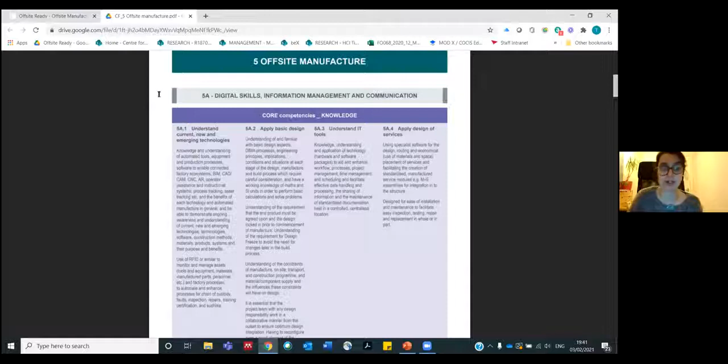And these are all numbered. For example, 5A.1 is the module number. It's all about understanding current, new, and emerging technologies. And this is a description of what's included. And then if you go to something like the PowerPoint slides, you see that starts with 5A, and then you have 5A.1, understand current new and emerging technologies.

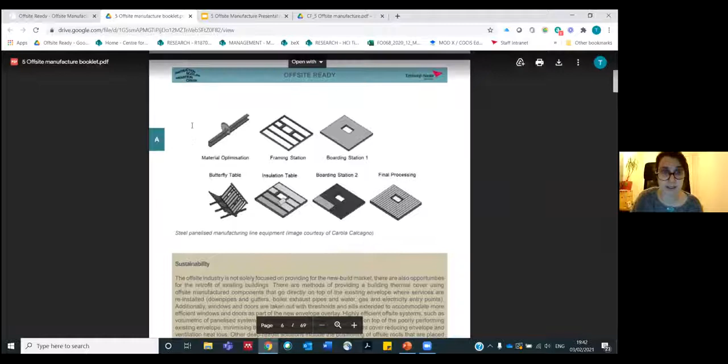And that way, using those codes, it becomes very easy to find what you need, whether you prefer to learn using PowerPoint slides or more technical PDFs with detailed explanations. You can very easily find the information you need, and it's all evidence-based, using lots of interviews with people who are working in UK offsite construction right now, using lots of fantastic images created by Carola Calcagno, and also lots of project case studies from the Offsite Ready Awards.

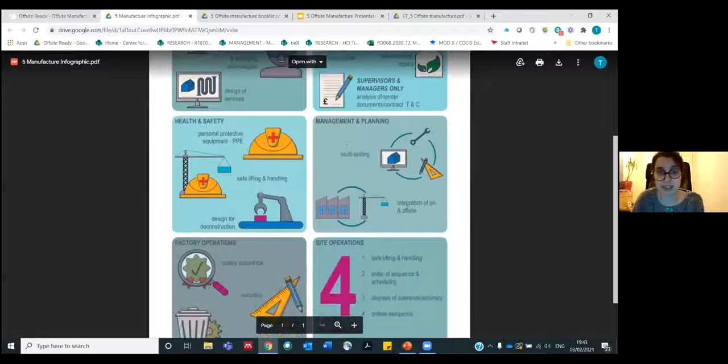So you can see the level of in-depth knowledge that goes into each of those sections. And if you do want a handy summary, there is also an infographic available for each of those modules that summarizes the key point within each step of the project life cycle. And if you do want to see more of me talking, as well as my colleague Katrina Jordan, there are also some talking head videos. So just

So you can see there's a whole range of resources there, whether you want to listen to somebody who's written the materials talking and explaining about their work, such as Dr. John Stinson, or you want to see Katrina Jordan and me summarizing the contents from the modules in a video, or you prefer to read a more in-depth PDF. There's lots of information right there for you.